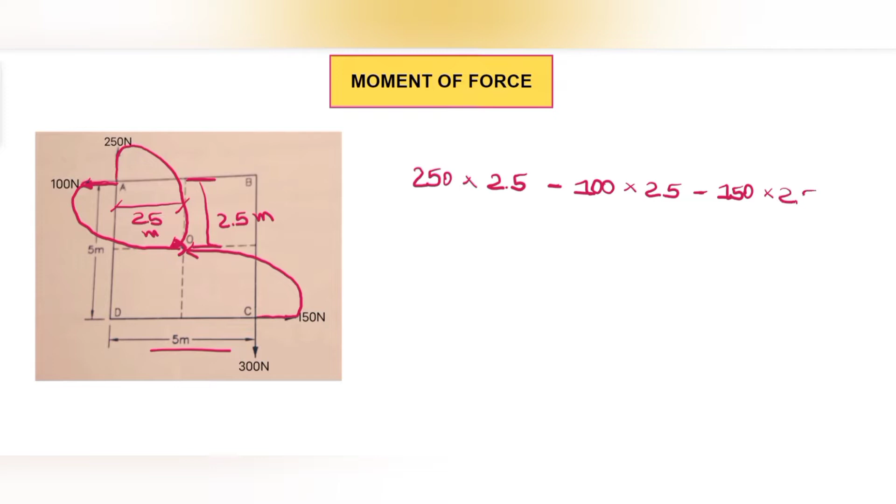Now let's see the direction for 150 Newton. Drawing it out, this moment becomes anticlockwise. So it will be -150 into, again, the perpendicular distance which is 5/2, that is 2.5.

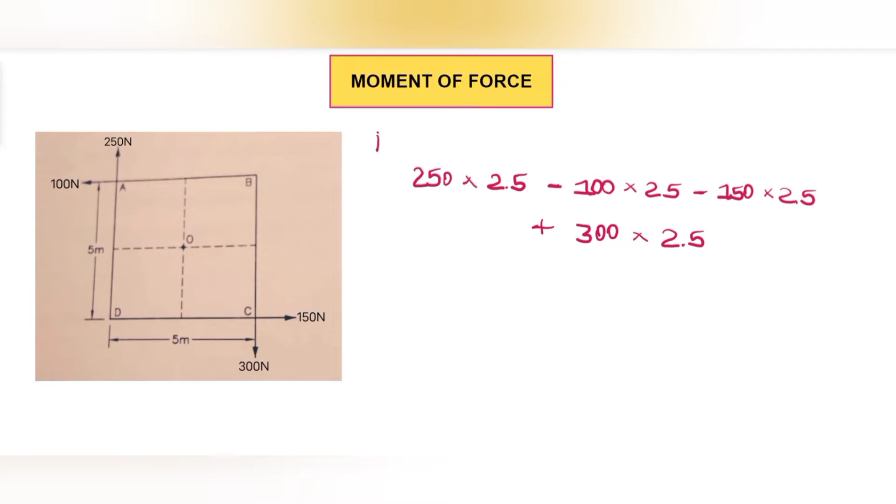Once you have found out the moment, just erase all those directions that you would have drawn with a pencil, and if you are comfortable with the thumb rule then that's well and good.

So here, moment about the center of the square will be equal to 750 Newton meter, and as we have got a positive sign for the moment, this means it is a clockwise moment.

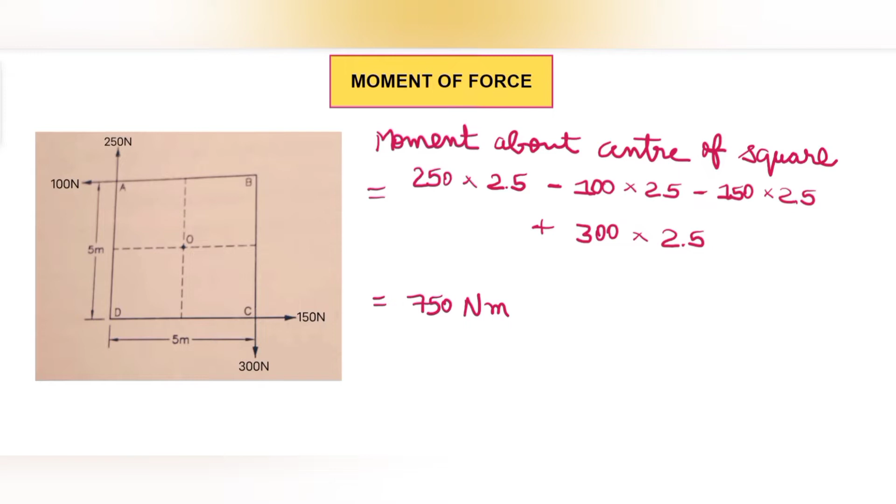Let's solve another question. Here we'll find the moment of force about A. First of all, let's see for this first force which is 600 Newton.

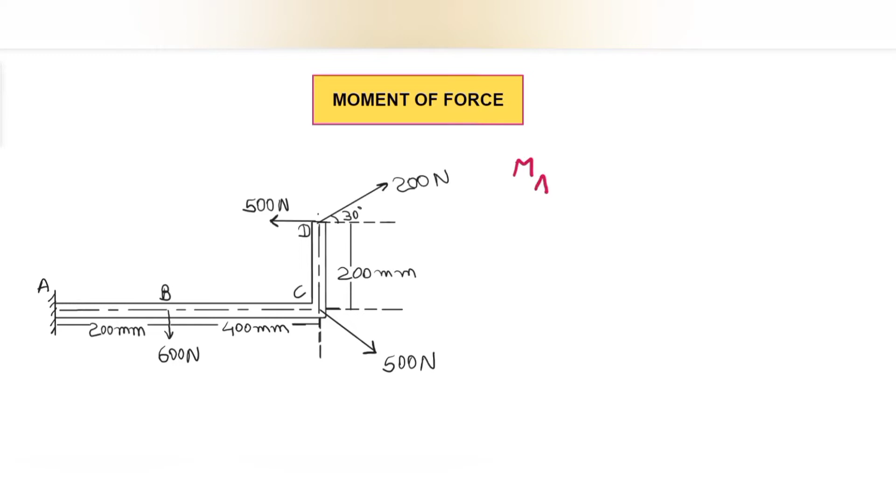When we go from the 600 Newton force towards A, it's clear that this is a clockwise moment. I'll write it as MA is equal to — clockwise moment will be positive, anticlockwise moment will be negative — 600 into perpendicular distance which is 200 mm, so it will be 600 into 200.

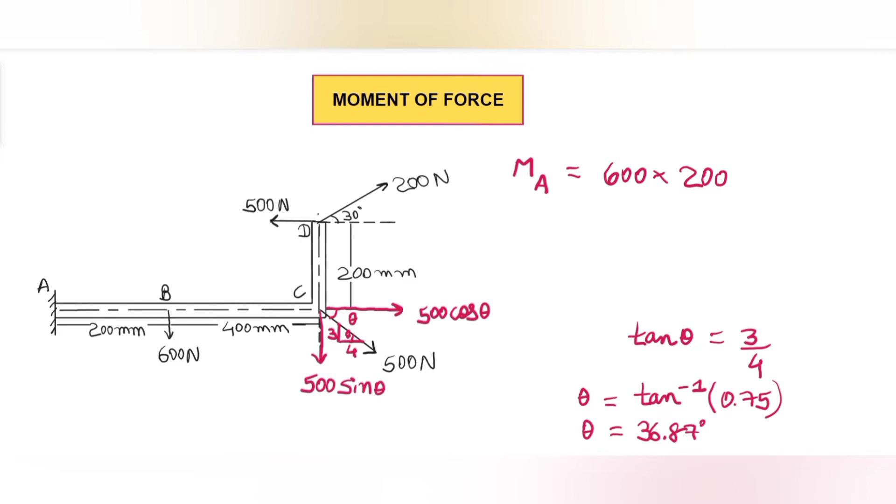36.87 degrees. This 500 cos theta is acting in the same line, therefore it won't produce any moment. Talking about this 500 sin theta, let's see the direction.

I'm just drawing it here this way. This means this is a clockwise moment, and this is the perpendicular distance which is 400 plus 200, so it will be 500 sin theta. Sign will be positive because this is a clockwise moment. Theta is 36.87, into the perpendicular distance, as I told you, it will be 600, which is 400 plus 200.

Then we have another force, which is this 200 Newton. Again, we'll resolve it in two components. Here, the adjacent to theta will be 200 cos theta, which is 200 cos 30, and this will be 200 sin 30.

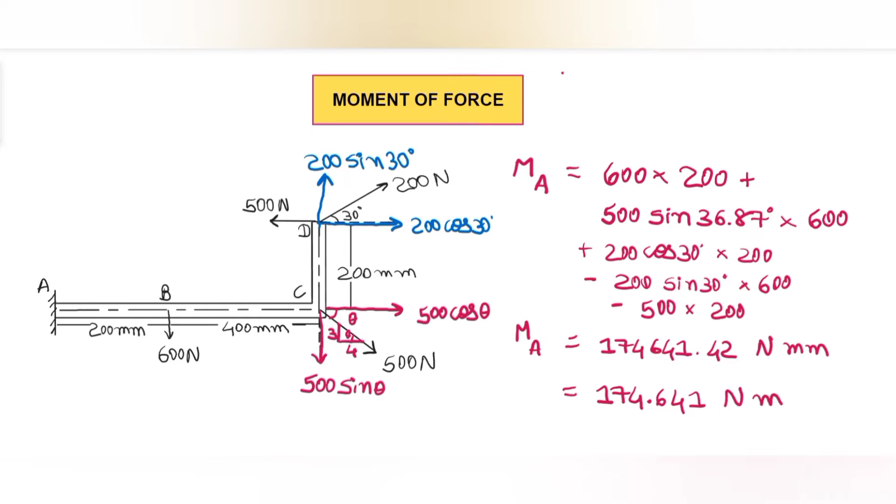Now let's see next question. This is based on equivalent force couple system. The question asked is, replace the forces acting on the rod by an equivalent single resultant force and couple system acting at point A. This means we need to find the resultant force as well as the moment.

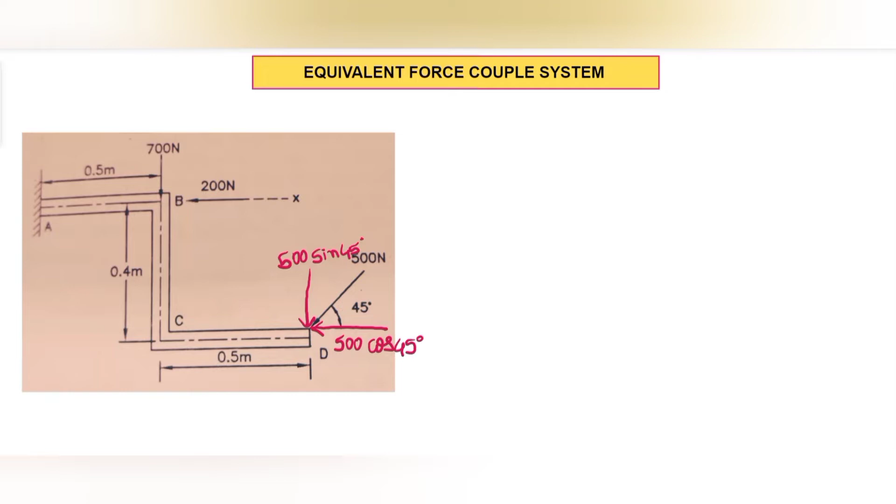This 500 Newton force, we'll resolve it in two components. This component is 500 sin 45, and the horizontal component will be 500 cos 45. The arrow is inward, so we'll also have inward arrows for both of the components.

Now we'll find sigma V and sigma H. Here the horizontal forces, as I can see, this 200 Newton force and this 500 cos 45 are my horizontal forces. 200 plus 500 cos 45.

Here both are backward arrows, so it will be minus, but instead of showing that sign we will show the direction of the arrow. So sigma h will be equal to 553.55 Newton, showing this way the direction of the arrow.

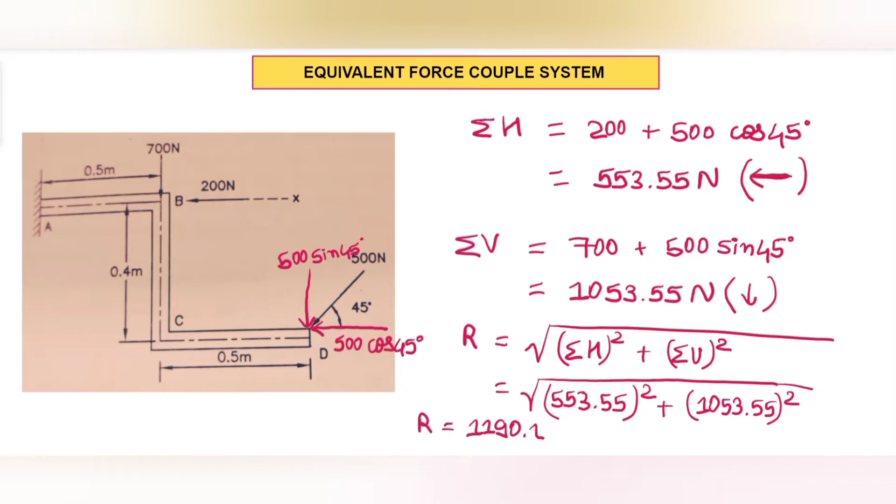So we have got our resultant force. Let's also find the direction of the resultant force. For that we have tan theta equal to sigma v upon sigma h,

and sigma v is 1053.55, sigma h is 553.55. This is equal to 1.903, and theta will be equal to tan inverse of 1.903, which is equal to 62.28 degree.

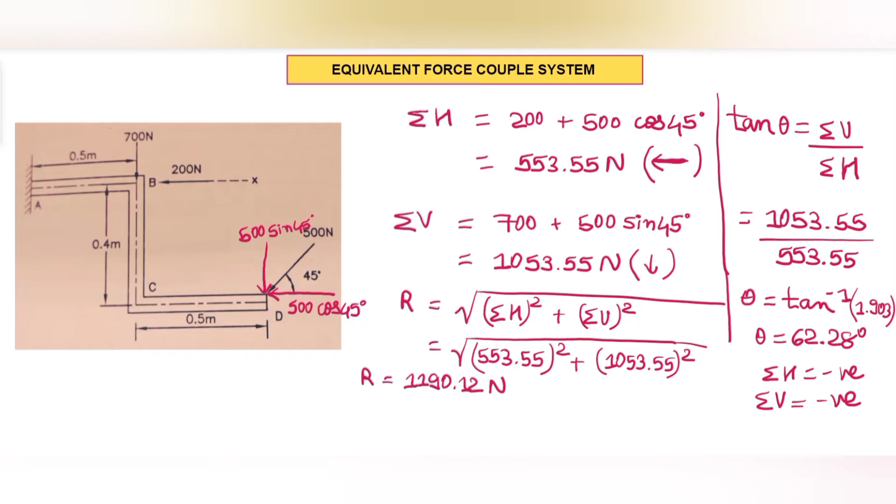And one thing we are having, which is sigma v and sigma h both are negative. That means that the resultant will lie in the third quadrant. Here we'll write it that sigma h and sigma v both are negative. Therefore the resultant will lie in the third quadrant.

Here the resultant will be there, this is my theta. Let me write this: the horizontal force, summation of the horizontal forces that we have got, which is 553.55, and summation of the vertical forces, which I'll write here, 1053.55.

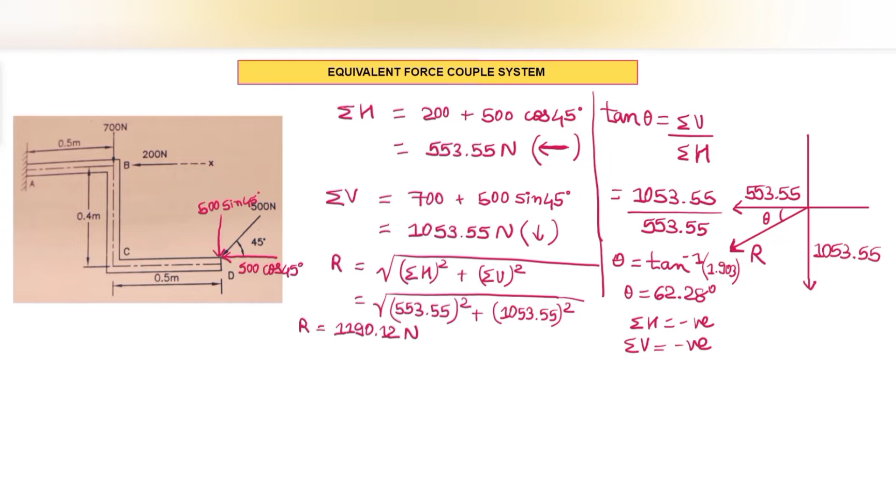The resultant force that we got is 1190.12. Now we'll find moment about A.

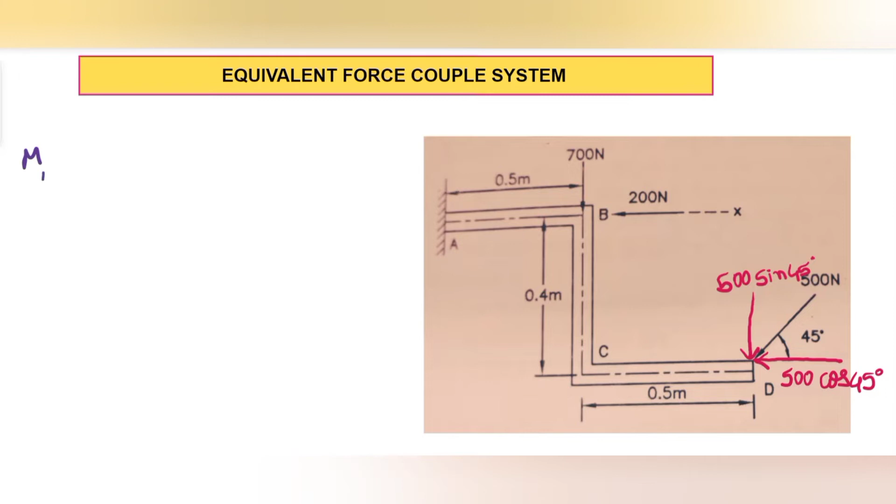First of all, this 700 Newton will act like this at A. This means it is a clockwise moment and this will be the perpendicular distance. So 700 into 0.5, MA is equal to,

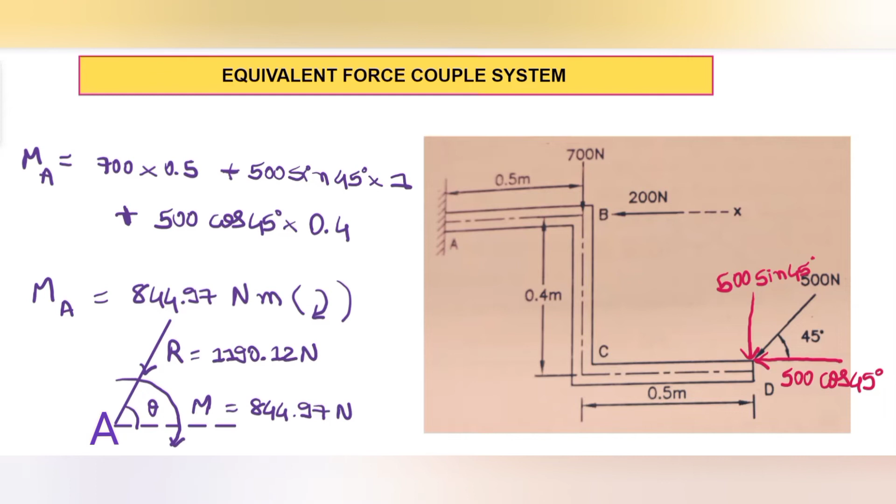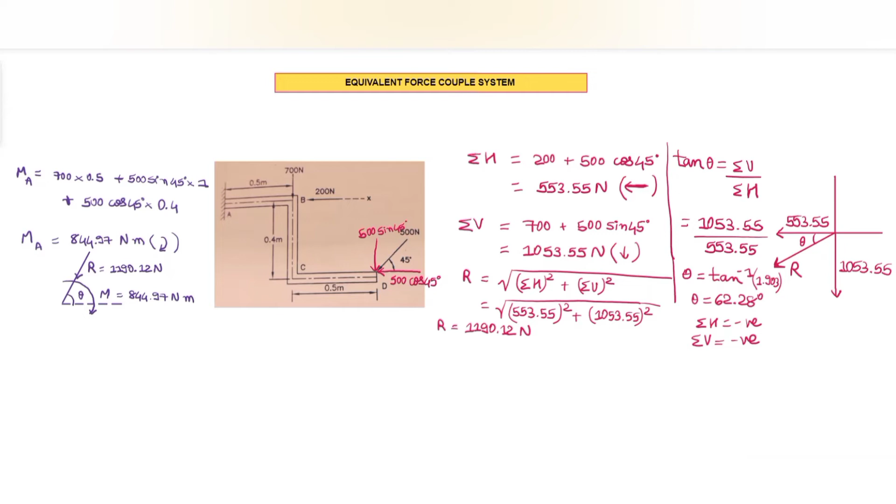This way you can solve the examples based on the equivalent force couple system. First of all we found sigma h, then sigma v, then the resultant force, and then finally we found the moment about A. And the last diagram that we have drawn, that is the equivalent force couple system.

Let's solve another example. Here we need to determine the resultant magnitude, direction, and location with respect to the center of the circle. The radius given to us is 3 meter. This is the diagram along with the forces.

First step will be to determine the summation of the horizontal forces. 150 Newton, which is this one, is horizontal force. Then this 100 Newton, I'll have to resolve it into two components. It is acting like this, here the angle is 45 degree. So this will be 100 cos 45 and this will be 100 sin 45.

Then from this, horizontal force is 100 cos 45. Now 150 is a forward arrow and 100 cos 45 is a backward arrow, so we'll have to use the signs. 150 minus 100 cos 45, which comes as 79.29 Newton, and this is positive, so it will have a forward arrow.

Sigma V is equal to, talking about the vertical forces, 80 Newton, this 50 Newton, then this 100 sin 45. 80 Newton and 100 sin 45 are having downward arrow and 50 Newton has upward arrow. So it will be 50 minus 80 minus 100 sin 45,

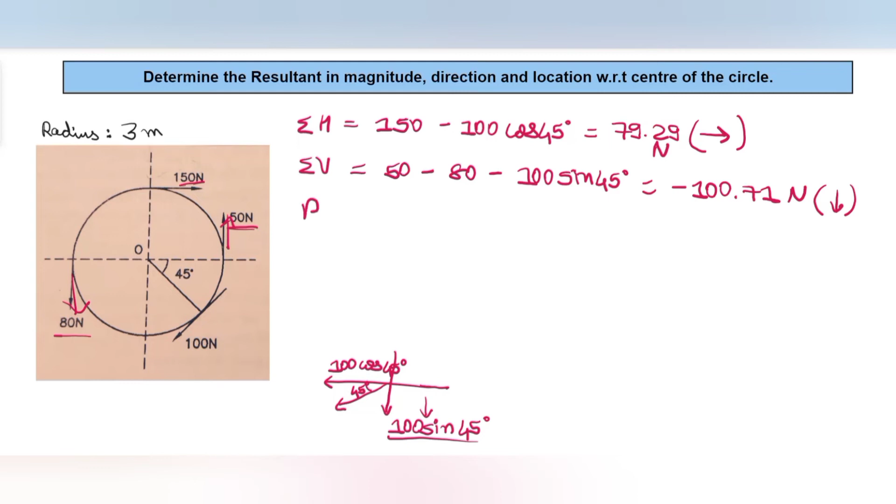Now we have the resultant force, which is sigma h whole square plus sigma v whole square under root, equal to 79.29 whole square plus minus 100.71 whole square, root of this. Therefore R is equal to 128.18 Newton. We have found the resultant force.

Now we'll find the direction of the resultant force, which will be tan alpha equal to sigma v upon sigma h, and mode of sigma v upon sigma h. Therefore tan alpha is equal to 100.71 upon 79.29. As that is mode, it will become positive, therefore it's equal to 1.27. Alpha is equal to tan inverse of 1.27, so we get alpha equal to 51.78 degree.

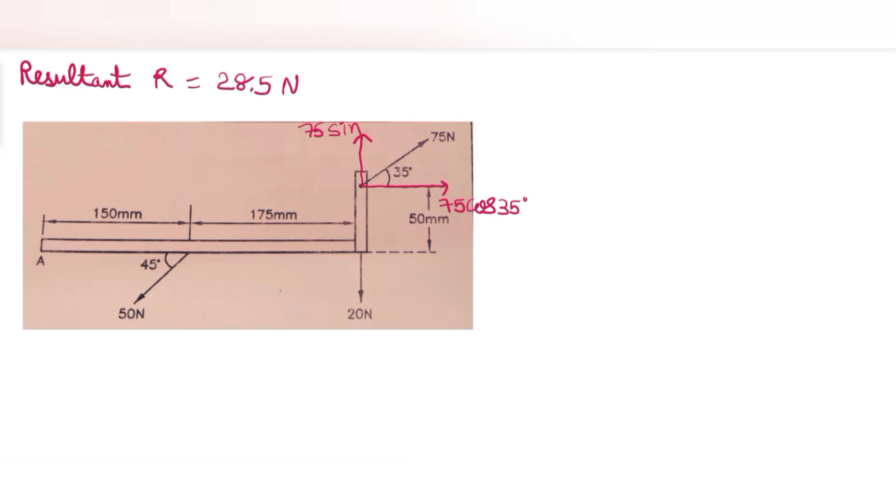First of all, resolving this 75 Newton force into components. This is my 75 cos 35, angle is 35 degree, and vertical component is 75 sin 35 degree.

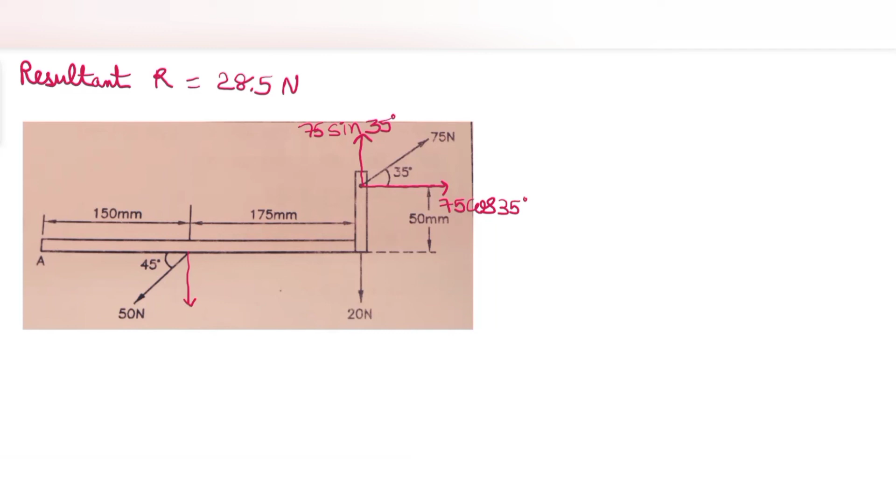And then after we'll see the directions. Also we have this force 50 Newton. We'll need to resolve it: 50 cos 45, and the vertical component will be 50 sin 45.

Now this 50 cos 45 is in the same line. This means it won't produce any moment.

Then let's see the direction for 50 sin 45. The direction will be like this. This is clockwise moment, and this is the perpendicular distance, which is 150 mm. So it will be 50 sin 45. First of all, I'll need to write this r into x. X is the perpendicular distance between my resultant force from the point A. So we have r into x is equal to 50 sin 45 into 150.

For 20 Newton, this will be the direction. Again, it is clockwise moment, the perpendicular distance will be 175 plus 150. So plus 20 into 325.

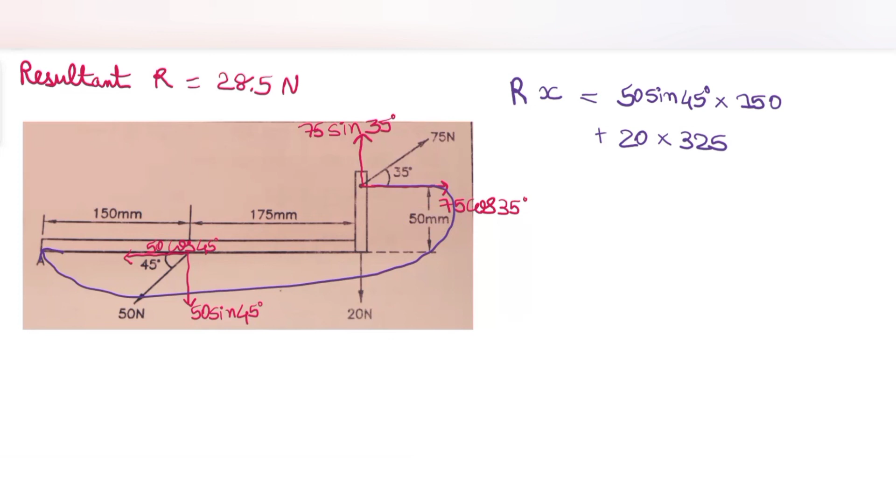Then we have the 75 cos 35. The direction will be like this. Again, clockwise moment, and this is the perpendicular distance, which is 50 mm, plus 75 cos 35 into 50.

And then we have 75 sin 35. As you can see, this is the direction. It is anti-clockwise moment, so it will have negative sign, minus 75 sin 35 into the perpendicular distance, which is 175 plus 150 mm, that is 325 mm.

On solving this right hand side, we get r into x is equal to 894.18. We already know the value of r, so it will be x is equal to 894.18 upon 28.5, which is equal to 31.37 mm. So these were the examples based on the coplanar non-concurrent forces.

You will be asked to find the moment of force, or you need to find the resultant force, its magnitude, the location at which the resultant lies from a particular point about which you need to find the moment.